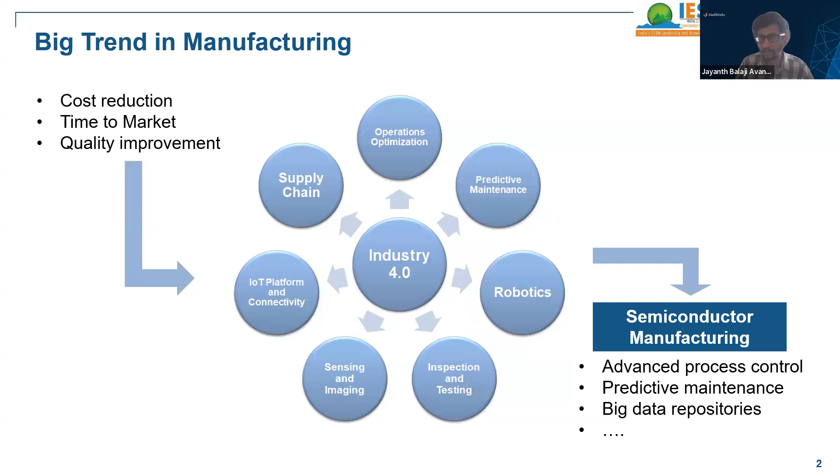So when it comes to Industry 4.0, as I mentioned, we've been talking about this for quite some time. In late 2000, 2010 onwards, we've been hearing this trend of Industry 4.0, or 4.01, and so on, industrial IoT, or several different terminologies like smart factories, connected factories, and so on. But if you ask me from my personal experience, whether we have achieved the full potential of Industry 4.0, the answer is no, because there's a lot of things that need to be retrospectively fitted, and we need to improve the overall workflows and things like that. And the newer generation machineries are coming into play to address these kind of industrial IoT challenges.

But when you take it in a nutshell, this is a report from McKinsey. When we have a quick look at it, there are several challenges that need to be addressed before achieving this Industry 4.0. Namely, the maintenance cycle is increasing by multifolds, so how to optimize that, or how to predict that a priori, or how to have a digital performance management system so I can monitor the connected machineries used for this manufacturing process. And also how to enable asset optimization, which is one of the crucial steps.

Because we have multiple machineries connected to achieve this overall process, if there's any provision to optimize the resources, it can be as simple as a reduction of 2% or 3% in overall power consumption, and so on. So there are multiple challenging problems associated with this industry segment, and that is also one of the opportunities for startups, where we see a lot of solution providers coming into the space. Probably it can be predictive maintenance, visual inspection workflows, or optimizing existing assets and things like that.

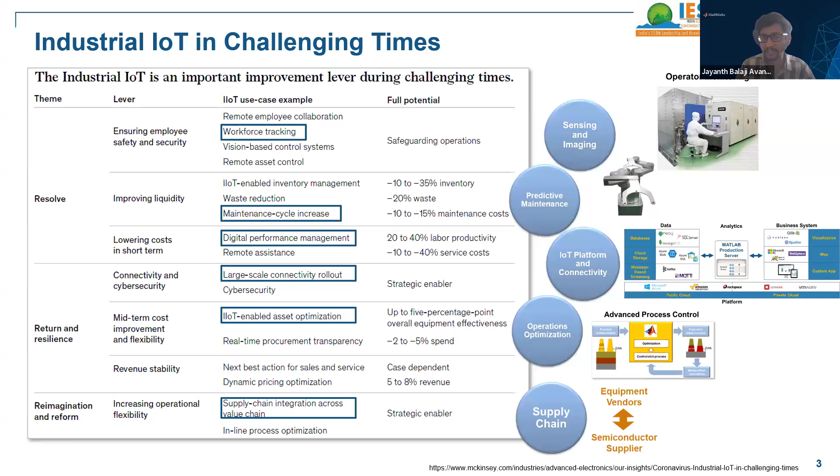This is a common trend we are seeing, where there is a lot of potential for startups to get into these kinds of areas, and we are seeing the same trend from our interactions with multiple users, and it's been doubling, or growing every year. I've been working with MathWorks for almost 5 years now, and from day one onwards we are seeing this trend, and it's been more than multifold - increasing these kinds of solution providers, especially in manufacturing segments. And it's no different with semiconductor manufacturing, because it poses equal challenges and equal opportunity as well. So that's where we thought of discussing the finer granular details of where we are seeing these kinds of trends and things like that.

Let's get into manufacturing trends in semiconductor manufacturing. One of the biggest things we're seeing is supply chain management. There's the semiconductor device manufacturer who makes devices, like ASML, and on the other side there's the consumer of these machineries who manufacture semiconductor chips. There should be synergy between these two users to produce an optimal design for their equipment such that overall efficiency is improved.

Instead of just bringing a case study of what ASML and SK Hynix tried to solve by working together, we wanted to show you the larger picture of what we're trying to solve: MATLAB can be used throughout the entire supply chain, starting from the device manufacturer all the way to the consumers.

In this case, ASML has applied model-based design to their lithography equipment. Model-based design is a way to devise your equipment in a much more elegant way, reducing your efforts in validation and similar tasks. All of this, done in a synchronized fashion, lets you start developing your machinery more effectively.

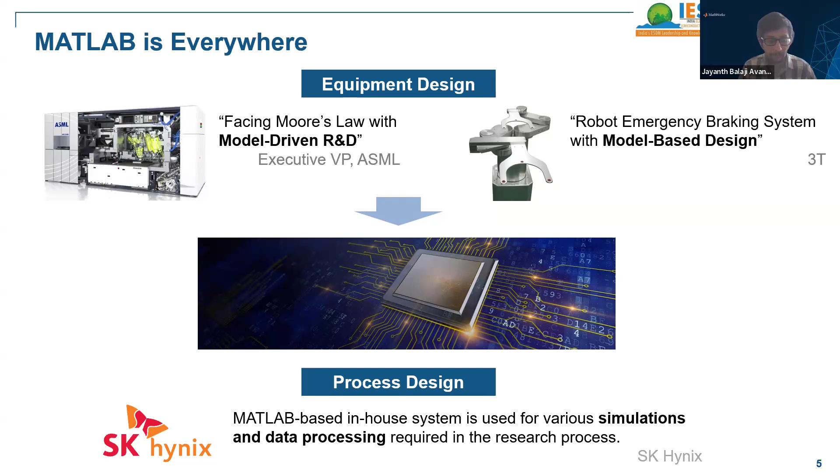Let's get into the details of one use case where both ASML and SK Hynix worked together. Overlay errors are one of the critical factors in metrology or lithography equipment. When there's a higher overlay error, there's a high chance of yield reduction. So it's effective to use an optimal methodology for virtual metrology that estimates the variables appropriately, so overall yield can be improved.

This is an interesting use case where machine learning is used as a tool to solve this metrology workflow, and both the equipment manufacturer and the consumer who uses this equipment come to common ground to understand how it can be utilized for the betterment of both sides, reducing the challenges posed by supply chain workflows.

For example, high error in overlay errors reduces yield, which affects the overall supply chain and revenue streams. This is a requirement from the semiconductor manufacturer, so the device provider can understand and add those features to their product to match their consumers' requirements. Both ASML and SK Hynix found common ground using MATLAB, and both started developing this workflow together.

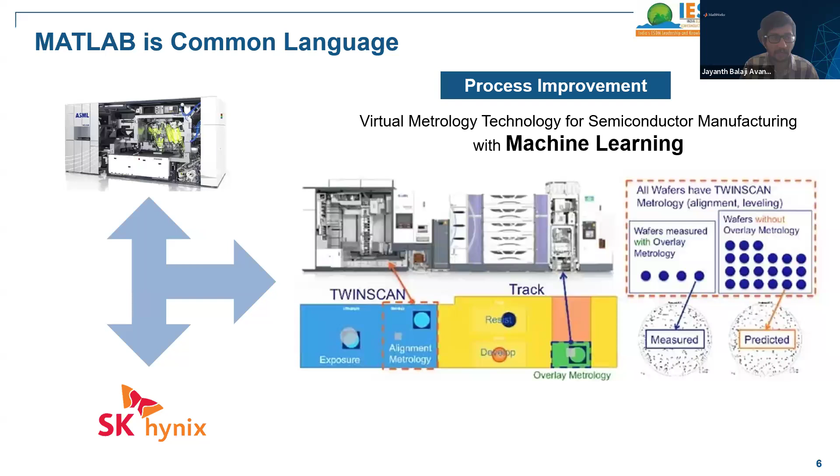So this is one of the case studies where MATLAB is heavily used in machine learning based workflows, and it's also one of the requirements of process improvement on the semiconductor manufacturing side. So let's quickly get into the other common trends that we are hearing.

For example, predictive maintenance, visual inspection, imaging kinds of things. This is a common trend we are hearing because you're working on highly critical equipment. The downtime, the unprecedented or unpredicted downtime, will affect the overall process itself, and it can cost $1 million or more.

That's the reason many people are trying to forecast their maintenance cycle from the data generated by these highly critical equipments, especially in semiconductor wafer manufacturing. Each and every minute or second counts, and unprecedented downtime may lead to losses of several million dollars.

That's why predictive maintenance is one of the interesting areas we are seeing, where several industries are trying to understand the data generated from their machinery to devise a strategy so they could predict the maintenance cycle of their equipment. Why is it necessary? If they know the maintenance cycle, they can perform planning accordingly and reduce unpredicted downtime, meaning they don't want any accidental downtime because of equipment failure. If equipment fails accidentally, you lose a lot of hours, which in turn means losing a lot of money.

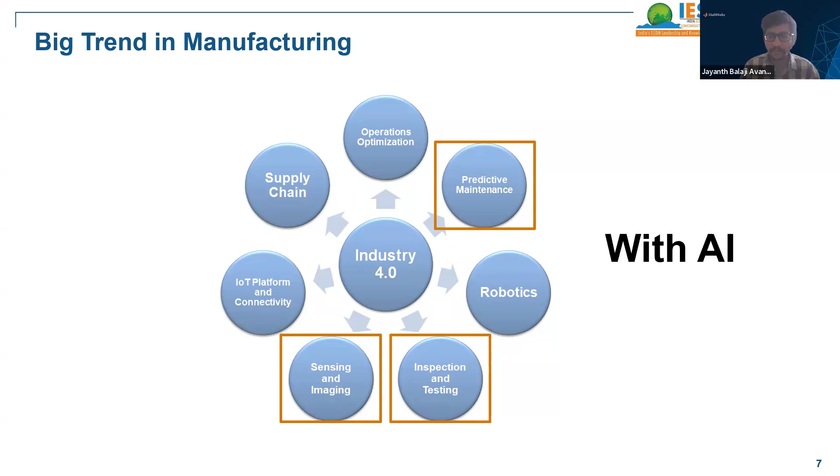Each technology like this can be solved with AI-based workflows, but each has its own challenging problems. For example, with predictive maintenance, one common thing is that most of the time it's time series data. The other challenge is how to find a suitable model to predict certain anomalies, and if you devise an algorithm, how to take it to final deployment.

End of the day, no one is just working on a research problem for publication, because eventually even the research problem needs to go to production to generate revenue streams. That's where deployment comes into play, converting your research or work into a deployable product that can be utilized for certain cases. In this case, it's predictive maintenance.

What that means is there can be several equipments, and you're gathering a lot of time series information from them, then trying to devise an algorithm that predicts the maintenance cycle. Eventually it can't just sit on your laptop or desktop—it needs to go to the production setup. That's where deployment comes into play.

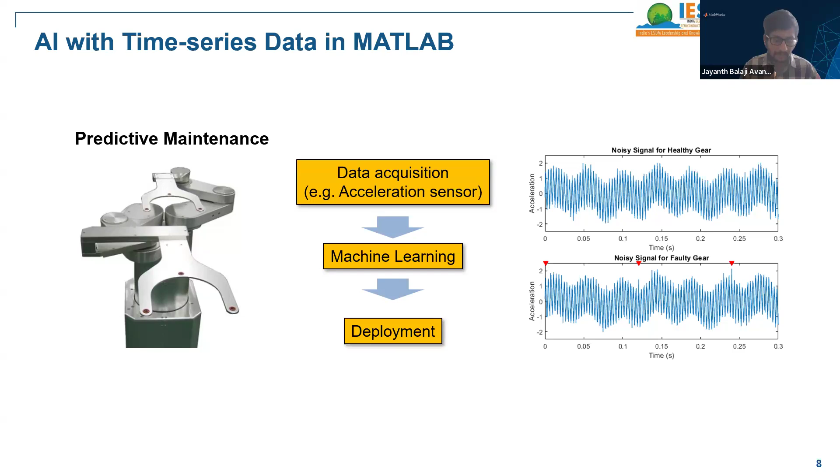It's a common thread, but ideally, where MATLAB comes into play is it streamlines these workflows—the majority of the challenges like how to bring in your data, how to devise your algorithm, and how to finally take it to deployment. So you focus on the problem statement—in this case, a predictive maintenance problem statement—and figure out how to implement or take it to a deployable solution using tools.

In this case, you can leverage the data generated from your equipment to devise an algorithm automatically. That's one thing I want to stress, because there's no straightforward approach to decide which machine learning algorithm to use for a certain type of problem statement. It's a big problem we have when it comes to data-driven techniques.

You cannot manually go and change parameters or different architectures and try multiple combinations manually, because it's boring stuff. No one wants to just tweak parameters manually, try different trials, and compare results. In those scenarios, you can leverage the power of tools.

You can simply offload the algorithm search or pre-processing search, and develop an algorithm which matches your suitable accuracy. Finally, you can directly take it into the deployment phase—if your end device is a cloud-based architecture, generally we'll containerize the workflow and deploy it, or build archives and deploy it on cloud-based infrastructure.

There are a lot of manual efforts required there, but that can be completely automated, and we'll show an example of how you can do that. But end of the day, as domain engineers, the message you want to capture here is it can be any type of problem statement—in this case, it's a predictive maintenance problem statement.

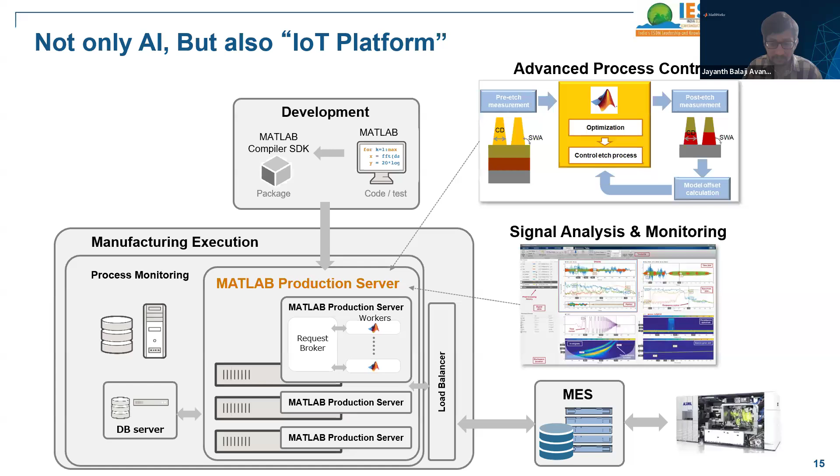You can even call that a digital twin, provided you have feedback with your existing asset to the system. But why these models are necessary, or how they benefit you, is that you can leverage the simulation model to fine tune or perform what-if analysis. For example, you can do all the worst case analysis because it's a simulation model. There's nothing catastrophic that can happen with simulation models. Ideally, you do foolproof forceful scenario testing in the simulation model to understand how your model behaves in the actual system, and then you can perform appropriate set points.

We perform these appropriate set points to improve the yield or optimize the resources we encounter. Even a 2% improvement in power efficiency is a big number in these process industries. We cannot directly implement our logic on the field because it could be highly catastrophic. That's why, before taking it into the field, you bring it into platforms, in this case Simulink, and perform what-if analysis, understanding the set points. Then finally you find the best heuristics, deploy it onto your field to get actual information. So that is one area where MATLAB comes into play, performing process optimization or operation optimization.

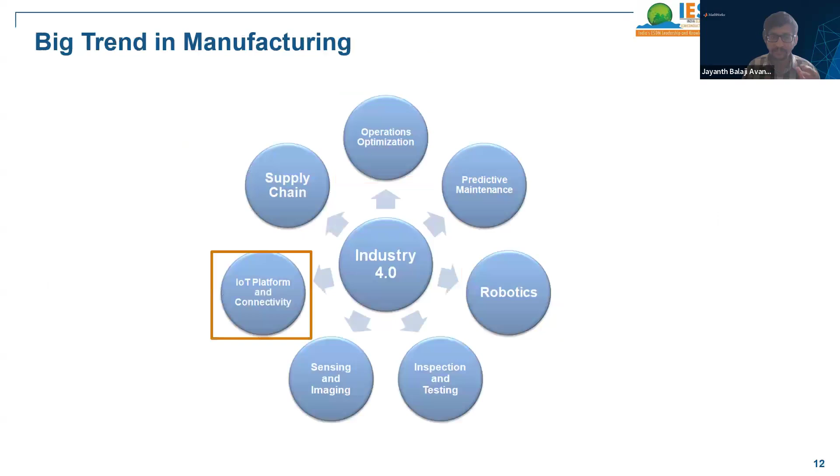Just to recall what we started with, these overall big trends in manufacturing, we showed several case studies or use cases we are seeing from the field, starting from the supply chain, where the device manufacturer and the wafer semiconductor manufacturer collaboratively worked and devised workflows. On the other hand, for predictive maintenance, we showed an example of how you can build your own predictive maintenance algorithms and streamline things. And for IoT, how MATLAB can help you work as an integration platform to gel different kinds of infrastructure and get insights out.

And even kind of a visual inspection or a surveillance kind of application, or advanced process control and things like that. We have shown a trend that we are seeing from the field.

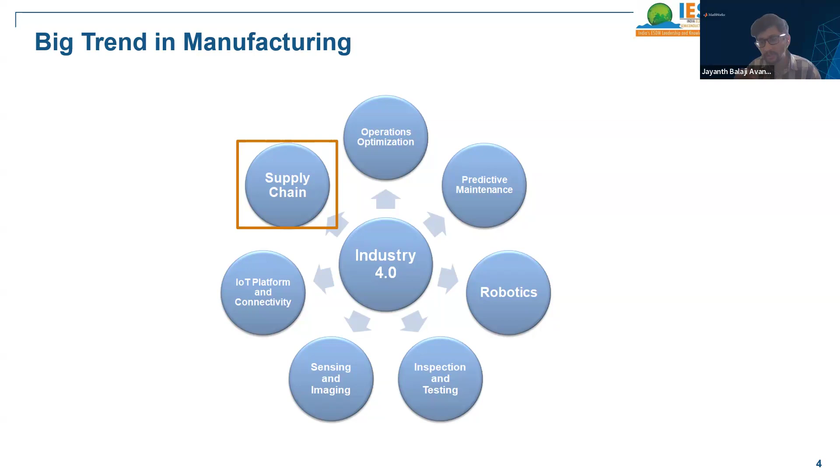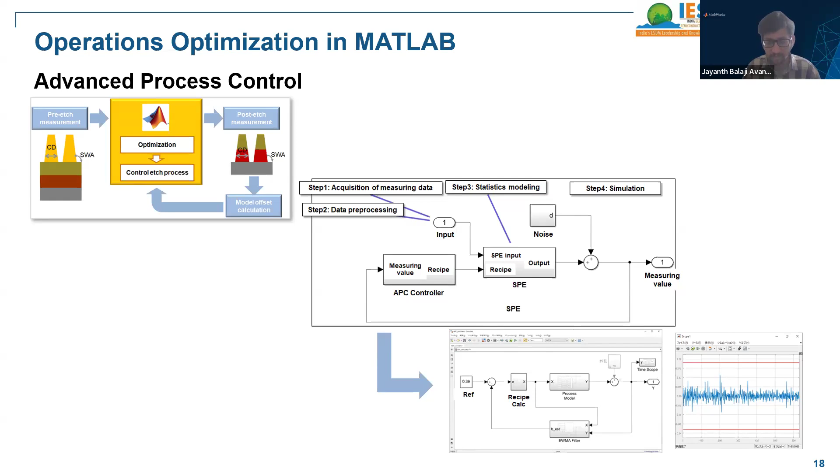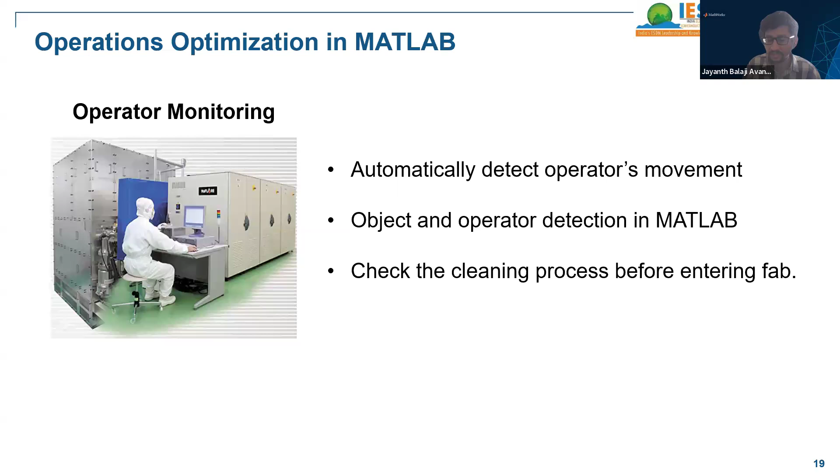Now maybe the question that comes to mind is why we are talking about this, because MathWorks, if you take it, is a software company primarily used in automotive and aerospace. If you ask why MathWorks is talking about these particular manufacturing segments, it's because our third biggest industry segment is manufacturing or industrial automation, where whatever case studies or snippets we are showing, it is an area where MathWorks is heavily involved with development, as well as from domain engineers like you we got the insights. Primarily, we gel the architecture together to form overall solutions in a much simpler and easier manner.

Maybe to get into one of the things, how we are supporting these kinds of workflows. It ranges with multiple flexible features available in MATLAB. Just to give an idea, if you're working on images, we have a dedicated stack that solves your image-based workflows. If you're working on time series applications, there's a dedicated stack which takes care of time series applications, and we primarily focus on engineering applications.

So what are the engineering applications that we try to show? It's predictive maintenance, signal processing, image processing, those kinds of things. It's a tool developed for engineers, and you can easily use and leverage those workflows to solve any kind of problem. In this case, we are showing manufacturing kind of applications.

One interesting factor is it's a no-code, low-code workflow that we support, which means it's not necessary for you to know MATLAB or be a programmer to solve a problem statement. So all the problem statements we showed earlier, ranging from supply chain management to machine learning based predictive maintenance or visual inspection, they spent very little time developing these architectures, which means ideally they focused on the problem statement, and the implementation or algorithm development point of view has been completely offloaded to the tools.

It is MATLAB and its toolboxes to accelerate your overall workflows. Not only that, whatever you develop in MATLAB or Simulink or its toolboxes, ideally no one just wants it to be worked on as a research problem sitting on the laptop or desktop. It can easily be taken and operationalized, which means you can take it to different deployment strategies - it can be cloud, or it can be embedded systems, and so on and so forth.

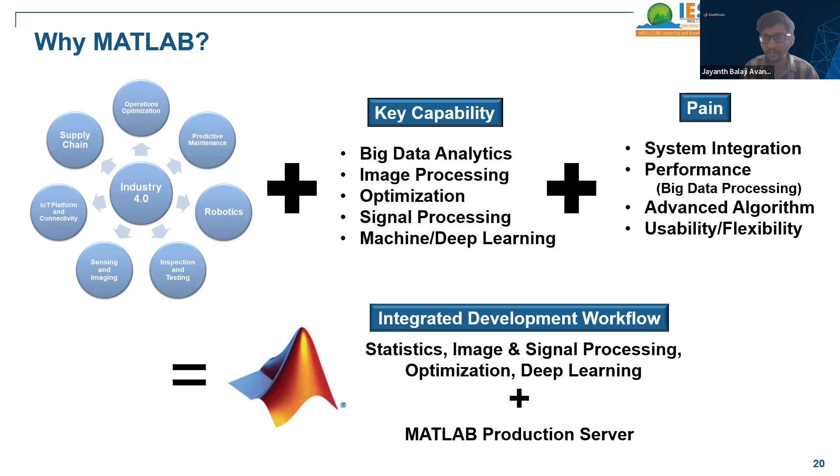That's where there are multiple tools available in MATLAB to do these kinds of workflows, and you can seamlessly complete your task. The task is predictive maintenance, and the workflow they want to choose is how to have a software-as-a-service kind of subscription model, and then we supported them, and it can be taken to final deployment and things like that. So that's the high level work we thought of showing you.

Apart from that, this is a common industry trend that we are also seeing in India, where multiple startups are coming into this space, especially as a solution provider or system integrator, to provide software-based workflows targeting the semiconductor industry segments. So that's also one of the areas that we are heavily investing in. Even our investment strategies are towards that, and we will be happy to discuss with you in detail.

And this is the high level thing that we wanted to discuss today, and we can have a question and answer session now. Probably Prashant, if you happen to see any questions from the tools, let us know.